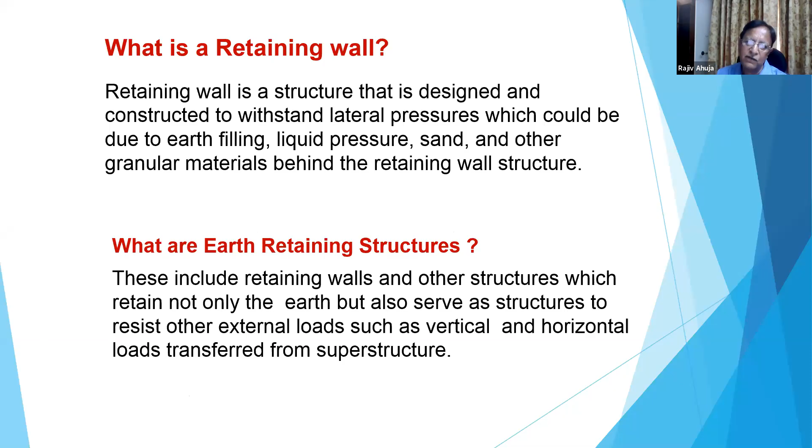Earth retaining structures have a very wide application in bridge and highway engineering. The quantity and cost of such structures can be very large, particularly in highway projects where such structures number in the hundreds and sometimes cost even more than major bridges. These are also used for slope stability purposes in hilly areas by the side of a road, and also used as retaining earth during construction phases, like sheet piling.

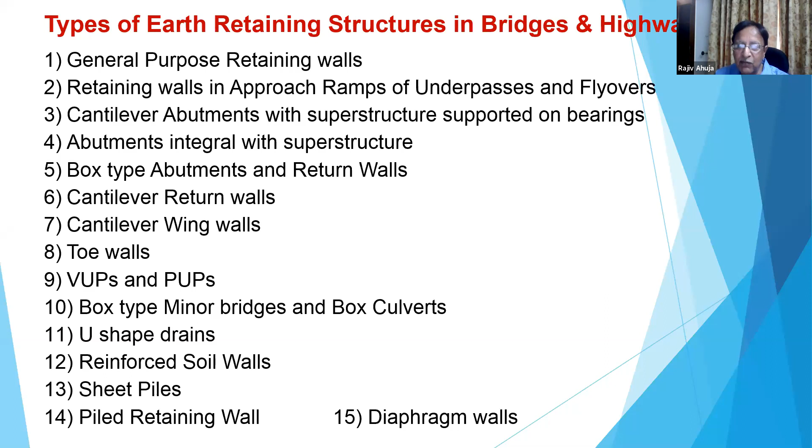If you look at the types of earth retaining structures, I have listed 15 types. First is general purpose retaining walls, then retaining walls in approach ramps of underpasses and flyovers, and cantilever abutments with superstructure supported on bearings. Then abutments can be integral with the superstructure. We have box type abutments, box type return walls, cantilever return walls, cantilever wing walls, toe walls, VUPs and PUPs—basically underpasses, which also act as earth retaining structures. Then we have box type minor bridges, box culverts, U-shaped drains, reinforced soil walls, sheet piles, pile retaining walls, and diaphragm walls.

Broadly, conventionally, retaining walls have been classified as gravity walls and cantilever and counterfort type walls. Gravity walls, as the name suggests, are constructed in PCC, stone masonry, brick masonry, gabions, and the stability comes from the weight. These are not reinforced, but the stability comes from the weight.

Whereas cantilever, counterfort, and buttress walls are constructed generally in RCC. We have a base slab, and the slab on the backfill side is called the heel, and the front side is the toe. If the height is not large, say up to 8 or 10 meters, we may have a simple cantilever wall. Otherwise, it can be stiffened by counterforts. Counterforts can be provided on the rear side—then we call it a counterfort wall. These can also be provided on the opposite side of the earthfill, and then we call it a buttress wall.

You see some samples here, like gabion gravity walls, which are provided by the side of the road. These are massive earth retaining structures and also help in arresting landslides. Cantilever RCC walls—all of you are very familiar with. And masonry buttress walls are more common, I think, in building structures.

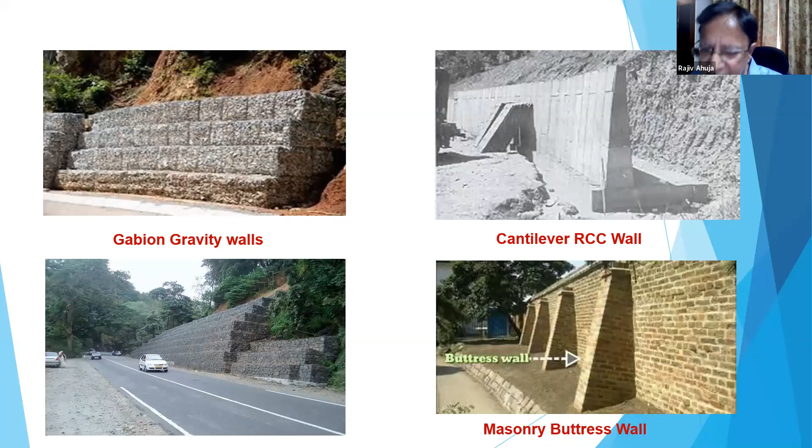In counterfort walls, we generally have rear counterforts starting from top to bottom. The advantage of the counterfort is that the front wall is stiffened, and it is then designed spanning across these counterforts. Counterforts are sometimes given on the front side also. If the heel span is quite large, then these are given on both sides.

Retaining walls can be precast also. Obviously, weight and height will be limitations. Base slab can be cast in situ, and the retaining wall comprising stem and wall can be precast. On left hand side, you see counterfort and wall precast together, whereas on right hand side, this is a hollow panel, because the height is more, to manage the weight it can be made hollow, and the cage is lowered inside subsequently and then concreted.

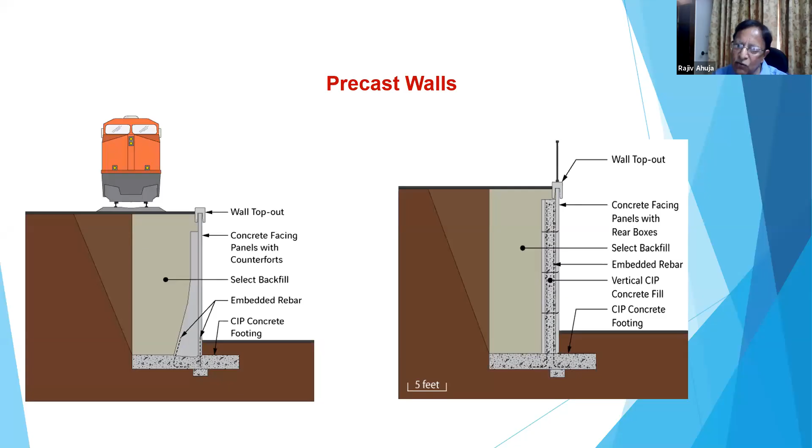Here you can see pictures of some precast retaining walls. This is done in India also, especially in box culvert structures, which have very large numbers in highway jobs. The height of retaining wall is limited to 4 or 5 meters, and since the number is large, these can be standardized and precast. This has been done in our country also.

Another type is anchored retaining wall. As the name suggests, the wall fascia is anchored into the hill. Anchors are driven into the material with boring, then are expanded at the end, either by mechanical means or often by injecting pressurized concrete, which expands to form a bulb in the soil. These are constructed when the space is limited or cutting of the existing slope is to be avoided. Anchored retaining wall is suitable for loose soil over rocks. You may have an existing formation of rocks, you want to construct a retaining wall and you are not able to provide a conventional retaining wall. Then anchored retaining walls can be provided.

These can be considerably high retaining walls constructed using this type. Deep cable rods or tie backs are driven into the earth and then the ends are filled with concrete. Anchors act against overturning and sliding pressure.

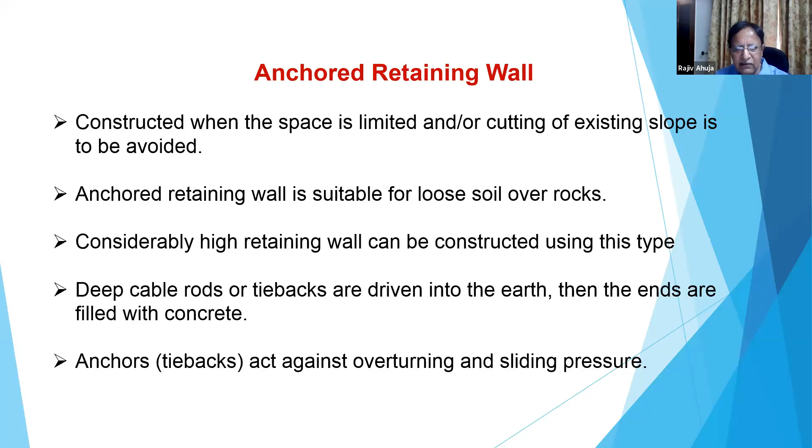Another type is L-shaped cantilever wall, though not very common. On the left-hand side, this is used to widen the existing formation. There is an existing formation, you widen at the top, but you cannot excavate behind, so you can provide an L-shaped retaining wall. On the right-hand side, the slab is below the earth fill. Here also, you cannot excavate for some reason on the front side, so L shape can be adopted. The only limitation is it cannot be very high, because to design a proper cantilever wall, you need a heel slab, you also need a toe slab.

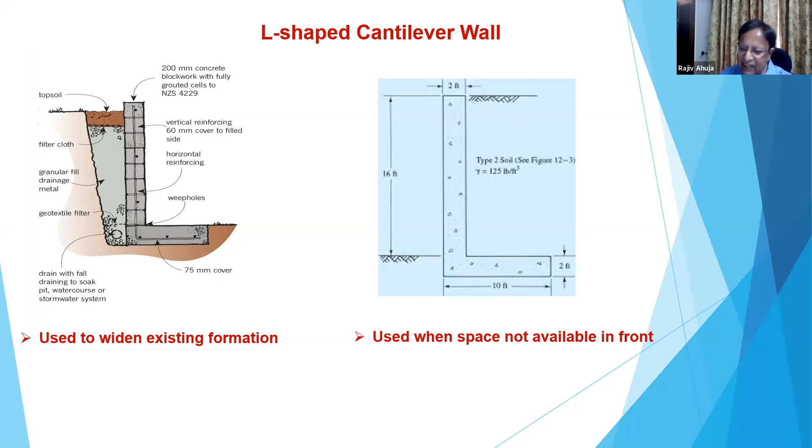Retaining walls also have openings for passage of water, either through a culvert or a minor bridge. So these things happen frequently in many projects.

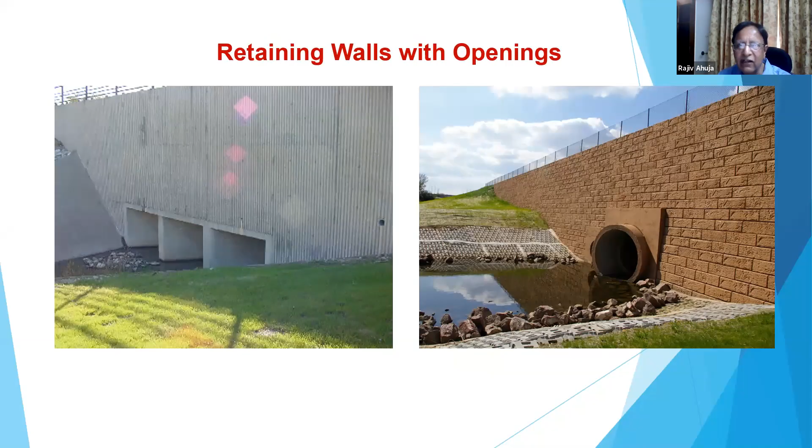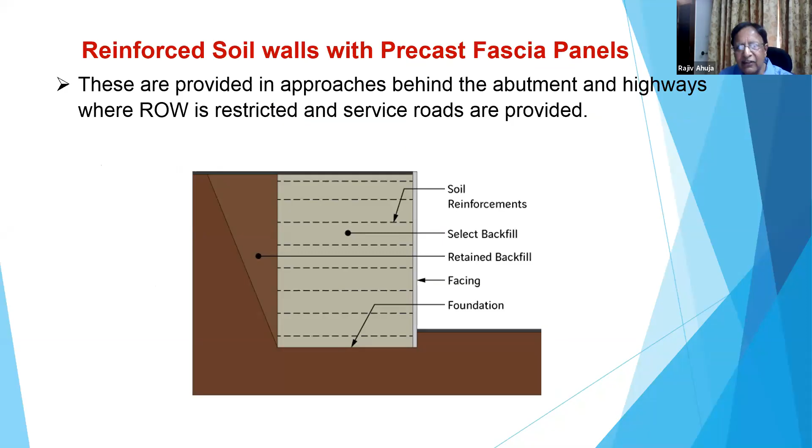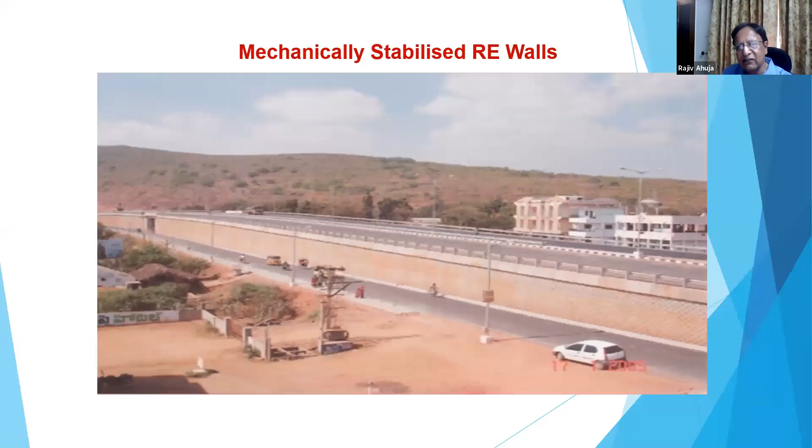This is a finished RE wall. It has a very long length. In fact, when the highway passes through towns, you don't have enough space, and viaducts are very costly, so the RE wall has become very popular. You can have a service road on both sides, and these have been constructed for a very large length, 3 kilometer, 4 kilometer also.

Then in hilly areas, yes, this is very popular. This is known as a breast wall when it comes to hilly areas. If there is a road, then we have to construct on both sides to stabilize the slopes, so that there is no landsliding.

In embankments, right of way is a problem these days. You want to have now, mostly road projects are 6-lane, and eventually these will be widened to 8-lane. The space is a problem. And because of a large number of VUP, PUP flyovers, the height of the embankment is also very large. It may vary from say 8 meter to even 12 meter, 15 meter. And the space required to accommodate the slopes may be very large. It may not even be available also.

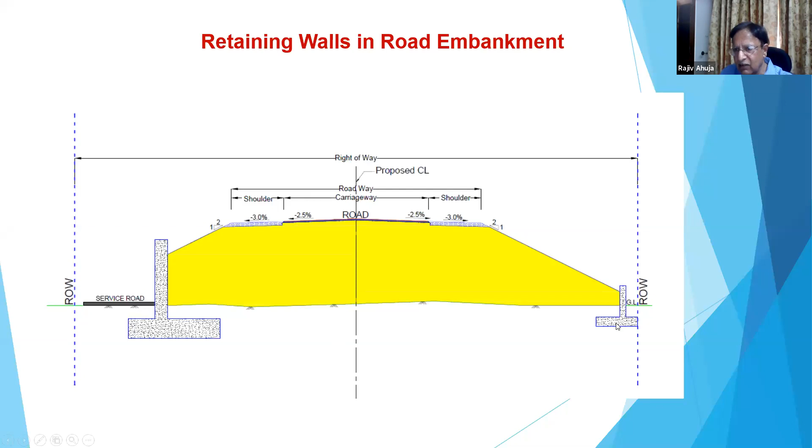And then you may have a service road on both sides, so the retaining wall becomes an integral part of an embankment. As you can see, there is a service road here. This is a retaining wall either as an RE wall or RCC structure. And on this side, there is no service road, so a small retaining wall, popularly called a toe wall, has been provided.

This is another interesting application. This structure is a real structure, used as an approach to a major bridge, and the subsoil is clay, soft clay, and there was no other option but to provide piles. So you can see each side retaining wall is supported on a row of piles, and then there's a longitudinal beam, and at every pile location, this is connected through a tie beam. Because of the tie beam, the thrust is transferred to the tie beam as a tension, and the piles have to be designed only for moment.

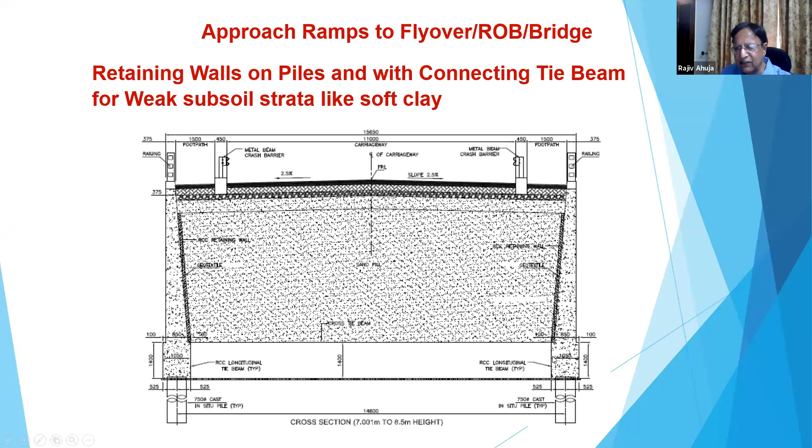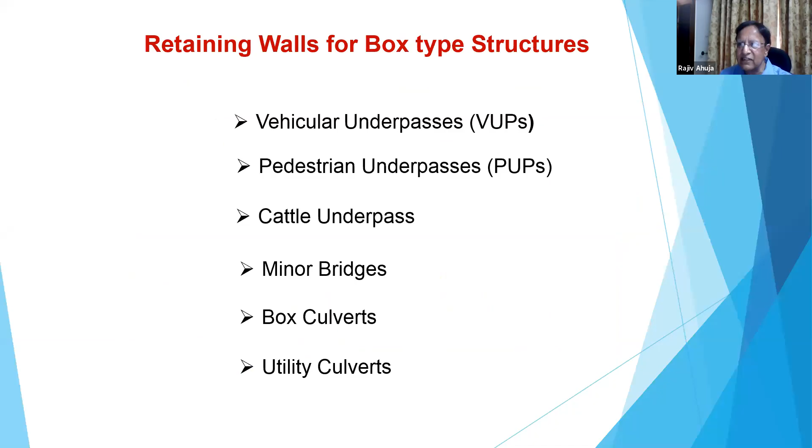Then box structures in highways also serve as a retaining wall, and these include vehicular underpass, pedestrian underpass, cattle underpass, minor bridges, box culvert, and utility culverts. Typically, VUPs are constructed over crossroads, and the standard dimensions are 12 meter wide and 5.5 meter vertical. These are clear dimensions, and these can be single cell, twin cell, depending on the width of the crossroad.

Pedestrian underpass normally has a dimension of 7 meter wide and 3 meter vertical clearance. Cattle underpass also has a width of 7 meter, but the clearance may be 3 to 4.5 meter, depending on the type of animals which might use this underpass. Like if one is expecting elephants to cross, then clear height will be even more than this.

The wing wall totally contains the embankment and nothing spills beyond this. Whereas in a return wall, you will always find the embankment spilling, taking the shape of a quadrant. We call it a quadrant.

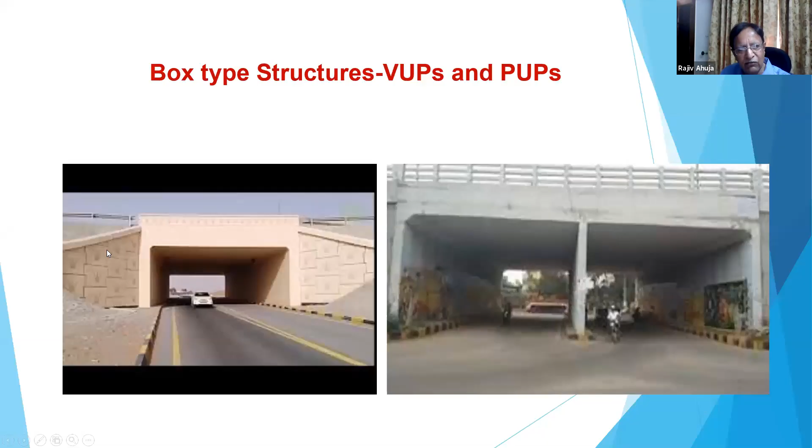These are some pictures of completed VUPs and PUPs. As you can see, these vertical walls also retain the earth, and you have the splayed wing walls over here.

Box type minor bridges typically have a span of more than 6 meters and length less than 60 meters as per IRC definition. Such bridges may be single cell or multi-cell box structure. Box culverts mostly are buried and have earth cushion on top, but in some cases the top slab is at the formation level of the road. This can be single cell or multiple cell.

Utility culverts or ducts are also provided as box sections sometimes. The width of these culverts may vary from 1.5 meter to less than 6 meter, and height is also variable, 1.5 to 4 meters. These are pictures of some completed box culverts, and you can see wing walls over here, which can be very long also.

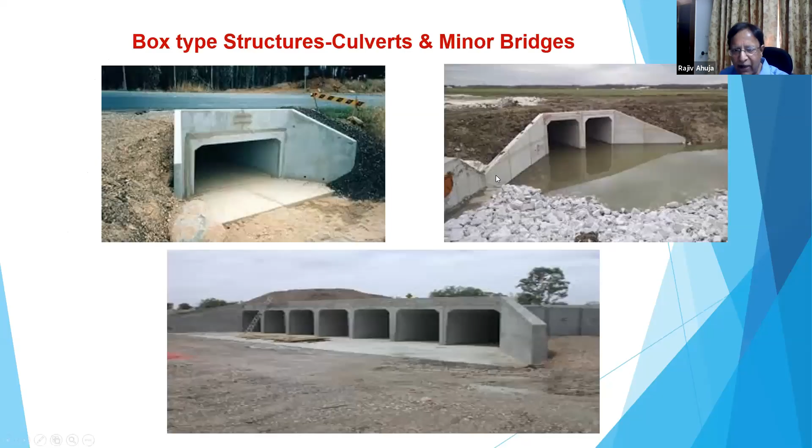Even U-shaped drains are also designed as earth retaining structures, especially in highway jobs when there's a built-up area. Between the service road and built-up area, these U-shaped drains are constructed with a typical height of say 1 meter. At some locations where the discharge is very high, even large-sized U-shaped drains are constructed.

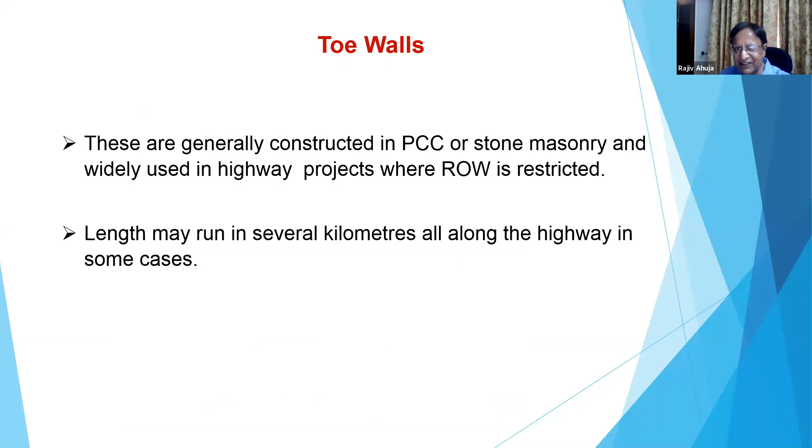Toe walls are very small height walls, generally constructed in PCC or stone masonry, and widely used in highway projects where ROW is restricted. Length may run in several kilometers, sometimes all along the highway. I have seen contractors bidding for a job not considering toe walls, or maybe nobody gave them the quantities, and while designing the structure they found the length was in kilometers.

Toe walls are also used at the edge of the quadrant pitching, which we discussed just now. This is an abutment, this is a return wall, and earth is spilling in the shape of a quadrant. Since the height is substantial, this is protected through stone pitching, and at the edge we provide a toe wall to prevent slippage and spreading of the soil.

Sheet pile walls are also very common. These are suitable for supporting deep excavation during construction, providing protection to existing structures during construction. If you are doing excavation in a built-up area, you have to protect the buildings. Building cofferdams is a very important application in rivers for construction of well or pile foundations.

Sheet piles can be cantilevered for small heights, say up to 5 to 6 meters. If the height of excavation is large, this can be anchored at the back. Sheet pile material can be timber, RCC, or steel. Behavior analysis and design of sheet piles is quite complex.

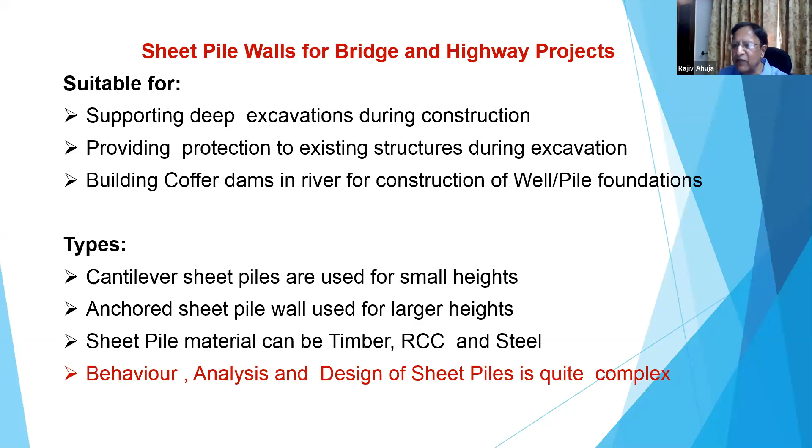Here you see an example of a sheet pile being used as a cofferdam. The sheet pile has been driven and a cofferdam has been created, because when you want to sink the well in a river which has a standing height of maybe 4, 5, 6 meters, you have to create an island. It's a normal practice, and sheet piles are used here, and well sinking can then be taken up.

On the left hand side, you see sheet piles. This is supporting the existing bridge. If you are constructing a new bridge by the side of an old bridge, very close to it, excavation has to be done for casting the foundation and abutments, and the existing formation is protected through sheet piles.

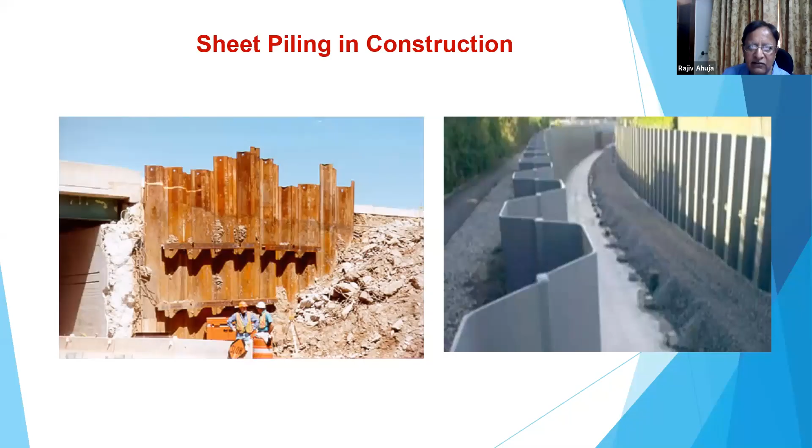This is an example of a large bridge where sheet piles have been used for casting the foundations.

Another type is secant and contiguous pile walls. Secant pile walls are formed by constructing intersecting reinforced concrete piles. You can see here these are called primary piles, which are cast in stage 1. Once these are cast, secondary piles are cast with reinforcement or a structural steel section, and then this becomes a full wall.

These are provided where sheet piles cannot resist the high earth pressure, and if these are to be used as a permanent structure, one can provide waterproofing as well as a concrete wall. Now, contiguous piles are a little different. These piles have a little gap in between, consisting of piles arranged in a line, typically with a 150 millimeter gap between the piles. The soil between the piles can be stabilized using grouting technique if necessary, either before or after pile installation.

Here you can see the completed pile wall, and the left hand side shows schematically how these are constructed. Primary piles are constructed first, as you can see here, and then secondary piles with the reinforcement are constructed subsequently.

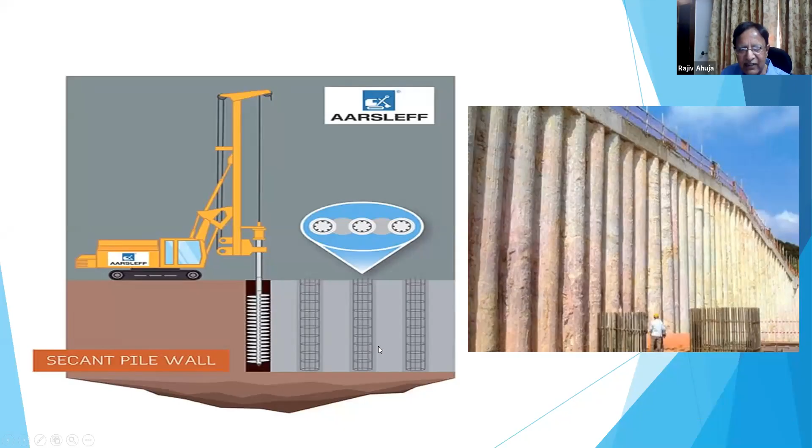A diaphragm wall is basically a continuous wall constructed in the ground to facilitate certain construction activities, such as to support deep excavation or as a permanent retaining wall. It is constructed using a trench excavated in the ground and supported by bentonite or similar fluid, until the mud is replaced by concrete after steel cage installation. Construction of a diaphragm wall is more or less similar to bored cast-in-situ piles, and it can be constructed up to a depth of even 60 or 70 meters.

This picture shows schematically how it is constructed. The first step is to construct a guide wall, for the entire length, with a clear dimension matching the thickness of the diaphragm wall, which may be 600mm to 1.2 meters. Then panel by panel construction is done.

First one panel is taken, which may have a width of 2 to 4 meters, and excavation is done through a clamshell or a grab, with end stoppers also provided. Once it has been excavated, the cage is lowered and it is completed, and space is left between this one and the next one to be taken up. Once alternate panels are constructed, the intermediate panels are constructed subsequently.

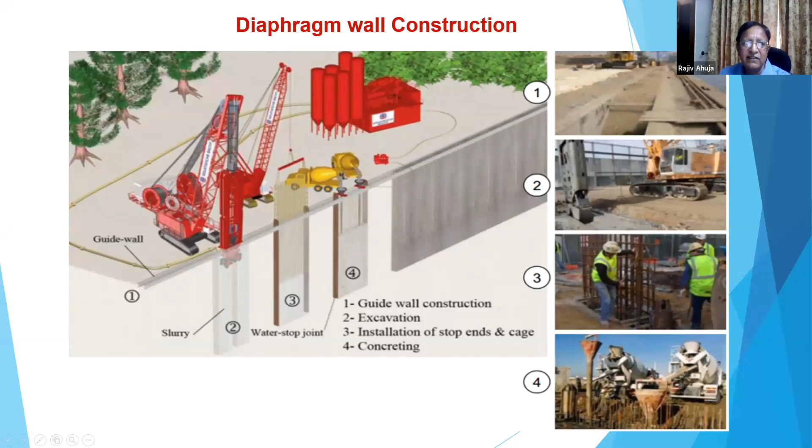In bridges, apart from temporary construction, these are also used as permanent structures. In an underpass where space is very limited, especially in urban areas, diaphragm walls can be used as a retaining structure for the underpass. They are also used in integral bridges where the abutment is a wall type and space is a problem, so the diaphragm wall can be used as an abutment too. Apart from this, diaphragm walls are very common in underground structures like stations, parking, etc.

This picture is for an underpass in Ludhiana. And when you look at it, you can't make out that a diaphragm wall has been constructed here.

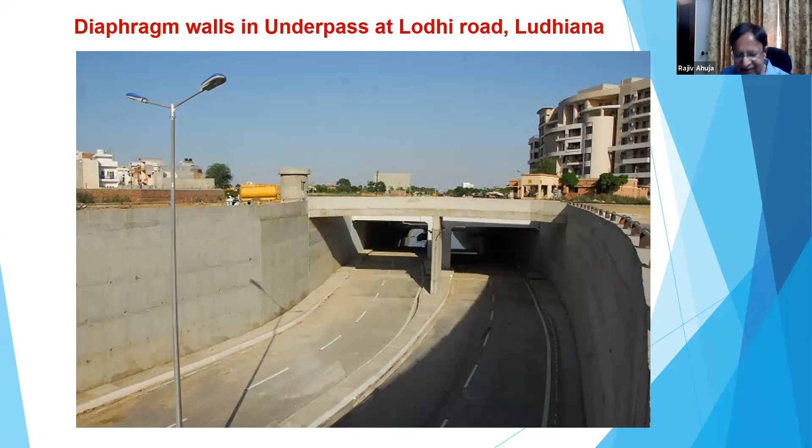The most common retaining wall structure in bridges is obviously abutments. Abutments are structures which support the superstructure either on bearings or integral with the superstructure, normally constructed along with the return wall or wing wall which we discussed earlier. Abutments can be non-spill-through or spill-through, and may rest on open foundation, pile foundation, or well foundation. We have box type abutments supporting the structure on bearings, and even box type structures can be integral with very large cantilever superstructures.

You can see in this picture, this is the abutment, and these are the wing walls, these are the return walls.

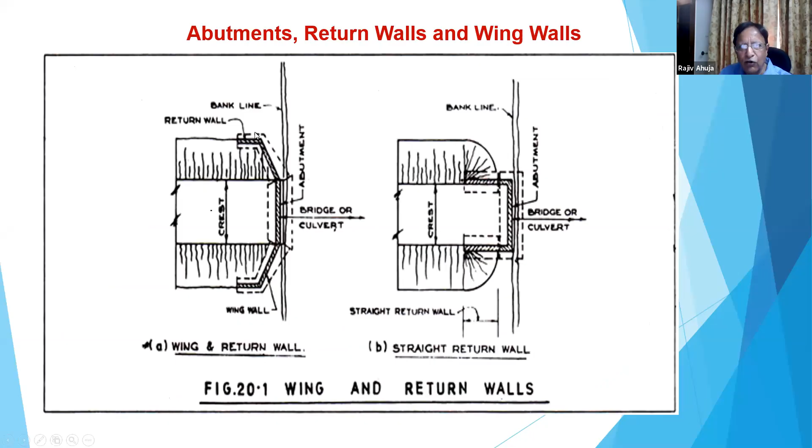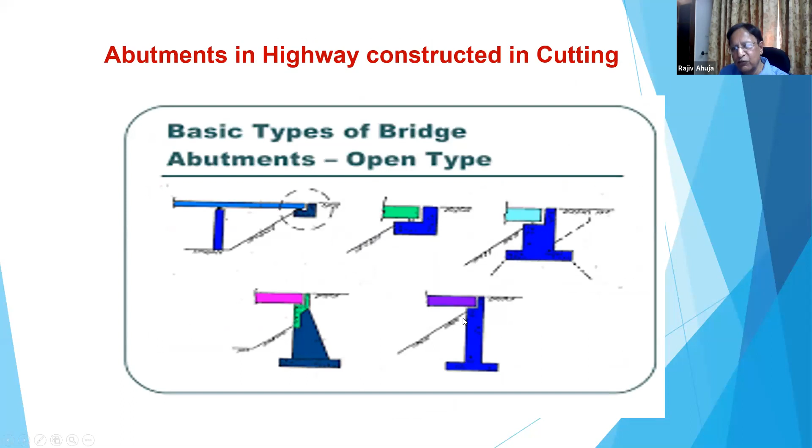Highways are constructed in cuttings, and overpasses may have to be constructed there. The retaining structure can be as small as just a bed block, if the rock is very good. Depending on the quality of the rock, the depth can be decided, and if the quality is very poor, the depth can be substantial.

Then we have bank seat abutments. These are suitable for small spans only. Why do we call it a bank seat abutment? This bank seat is resting on an earth fill, which can be a normal earth fill. In this case it is an RE wall, but this is suitable only for small spans because the bearing capacity here will be limited, and even the RE wall or retaining wall has to be designed for this surcharge. So spans are limited, but it looks very nice.

In this case, the retaining structure or abutment is RCC and the superstructure rests behind it. Here you can see some examples of bank seat abutments, and this is an RE wall, both longitudinally as well as in the transverse direction.

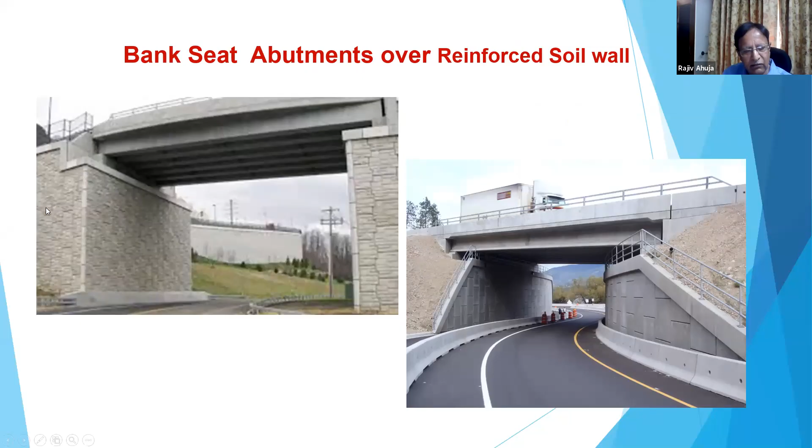In this case, the superstructure span is very large and the loads are very heavy. It's not possible to rest it on earth fill, so an independent structure is created. These are just like piers, normal piers, and just behind that, a retaining structure is created. We have two longitudinal walls and one transverse wall. You might have noticed this kind of construction is very common in our country now, especially in flyovers and ROBs.

We have another type, integral abutments. In an integral abutment, as the name suggests, the superstructure is integrated with the vertical wall, and it becomes an indeterminate structure. It may have an open foundation, it may be supported on pile foundation, or it may be just outside the RE wall. Sometimes it is supported on a single row pile or an embedded wall abutment, which is normally constructed as a diaphragm wall.

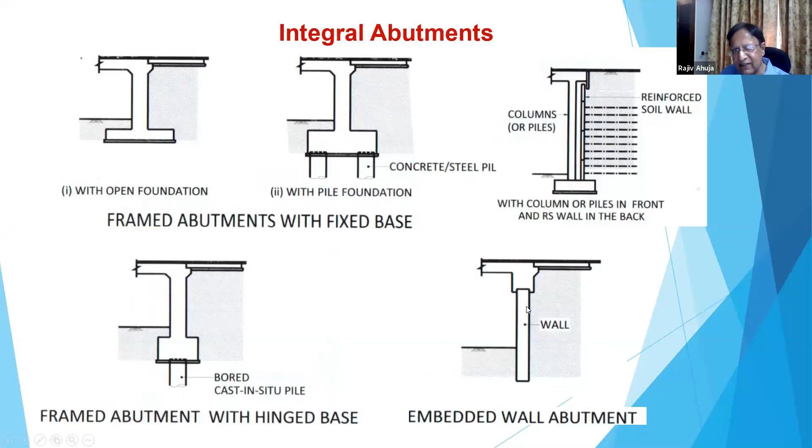We call it spill through abutment. Why spill through? Because sometimes earth pressures can be very large. If you construct a solid structure, it may be difficult to design the abutment, especially when it rests on pile foundation or open foundation. When you make it spill through, you relieve the earth pressure partly.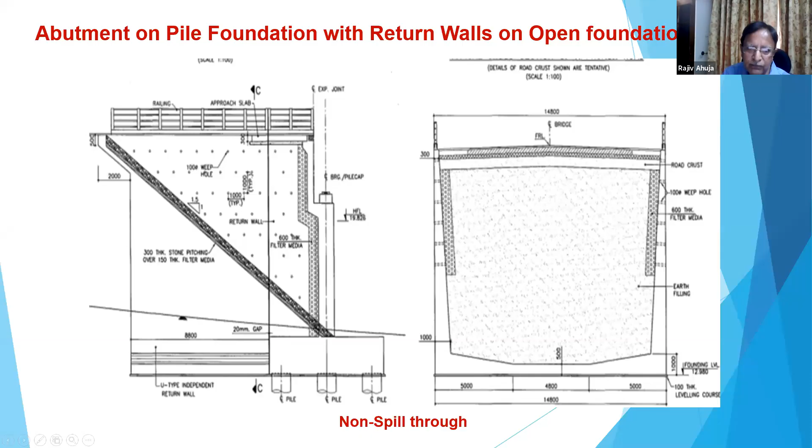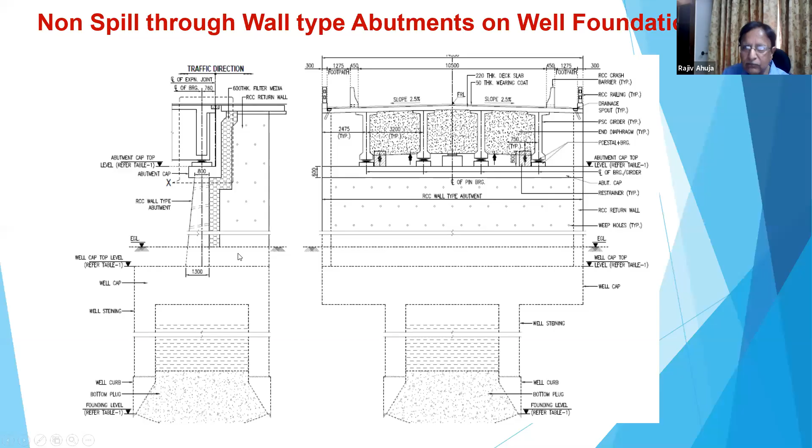In this case, if you notice carefully, the abutment is shifted. This is not constructed at the center; it is rather constructed at the edge, and the well cap also has been projected. Why do we do this? Because well foundations, especially abutment well foundations, are designed as a retaining structure, where the difference between formation level and founding level may be 25 to even 40 meters. This is a very large height, though it is resisted passively from the opposite side. But to reduce the active earth pressure, the abutment is constructed eccentrically with respect to the center line, and because of this eccentric weight, it provides a moment opposite to the active earth pressure moments.

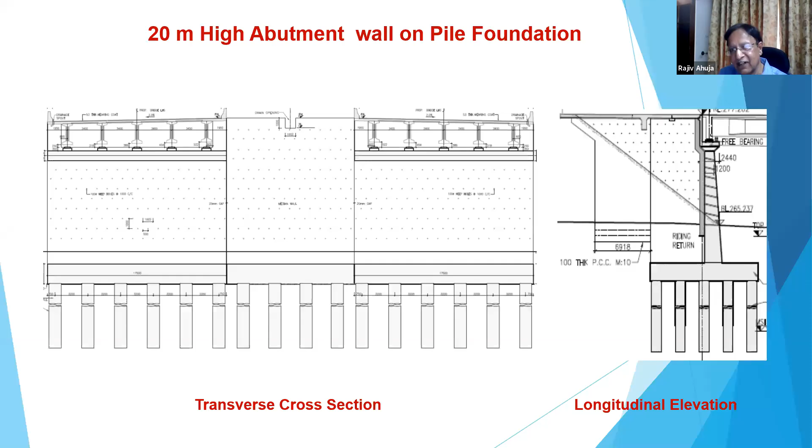This shows a 20-meter high abutment wall, with one bridge on the left-hand side and another carriageway on the right-hand side. In between, we have a median wall. This height is almost 20 meters and it rests on pile foundation. It's also non-spill through because we tried to provide spill through, but the client refused; they only wanted non-spill through. The thrust on each pile is very large: for a normal situation it is 100 ton, and for seismic it is almost 150 ton per pile.

You can see another section of 20-meter high wall on pile foundations. These are being constructed right now. And even while these are constructed, the abutment cap is complete and girders are being erected.

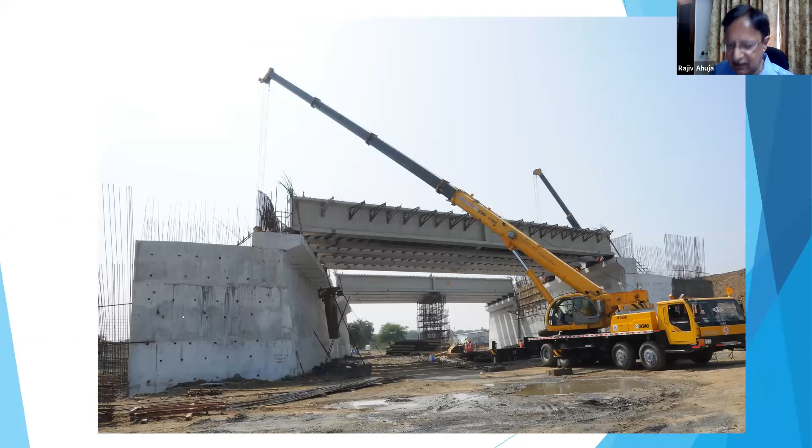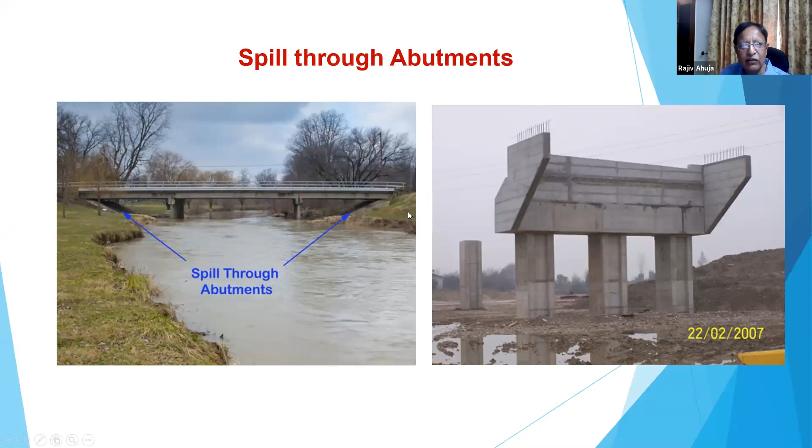Here you see pictures of a spill-through abutment. It has 3 piers and these are the openings through which earth spills. This is an abutment cap. These are butterfly wing walls and these are dirt walls. Left-hand side, you see the finished structure.

Now these abutments, when provided over river bridges, rivers are scourable. So to protect the abutment against scour, we have to provide a launching apron. In that particular case, the scour level is taken at the base of the pile cap or well cap because this is totally protected.

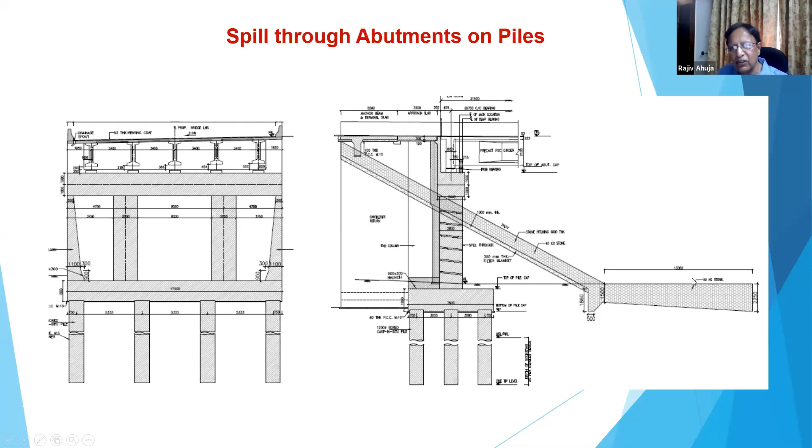Another interesting application is box type, counterweight type abutments, generally provided in hilly areas. In hilly areas, you will find you don't have space behind; after crossing this bridge, you have to take a turn left-hand side or right-hand side immediately. So the popular technique is you construct a huge abutment, constructed as a cantilever from both sides.

In between, you can have a suspended span or a central hinge. Now you can imagine this span can be as large as 130, 140 meters. This has been constructed in our country.

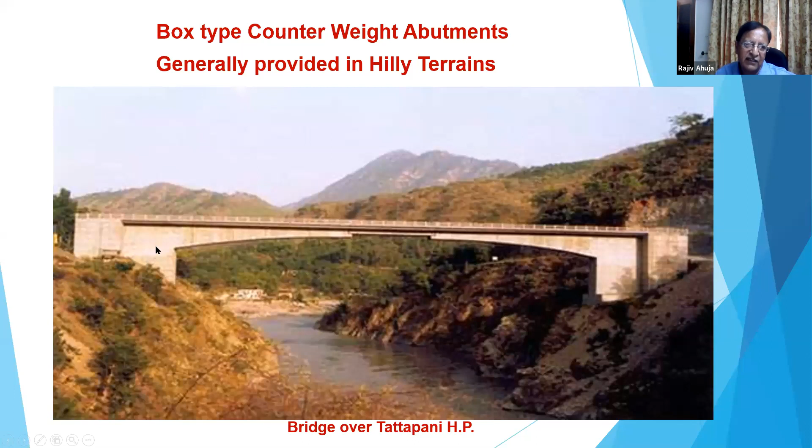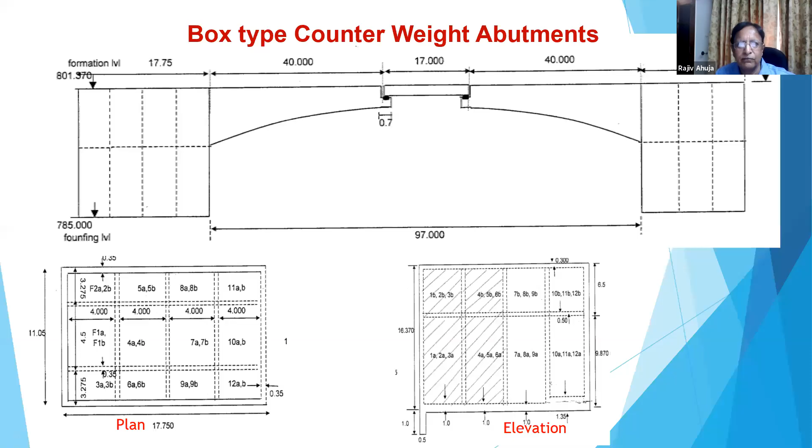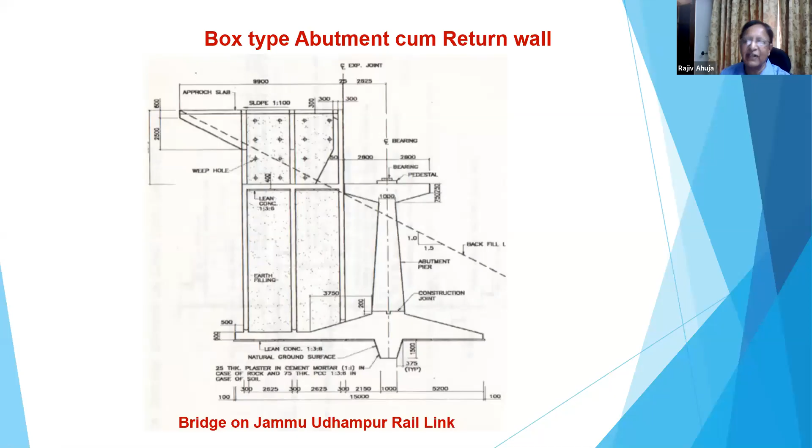And to retain the earth from behind, a box type retaining structure has been created. This was a very innovative idea in year 2000 when several bridges were constructed on the Jammu-Udhampur rail link, and I think this system was adopted in at least 3 bridges.

We have seen a large variety of earth retaining structures, and there may be many more, but all these have a common factor: they have to be designed for lateral earth pressure. There are many theories. Typically, lateral earth pressure includes active earth pressure due to retained earth and surcharge, earth pressure at rest due to retained earth and surcharge, passive earth pressure due to earth and surcharge, active earth pressure under seismic condition, passive earth pressure under seismic condition, then hydrostatic pressure in combination with earth pressure. There are some other causes of lateral earth pressure too.

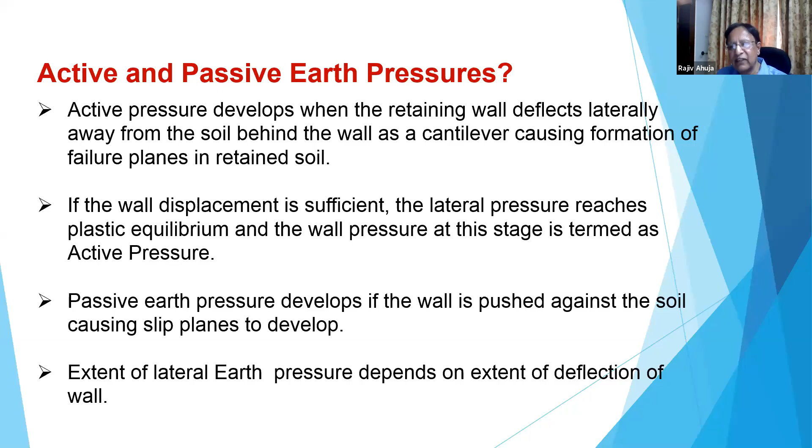Active earth pressure develops, as we all know, when the retaining wall deflects laterally away from the soil behind it as a cantilever, causing formation of failure planes in the retained soil. If the wall displacement is sufficient, the lateral pressure reaches plastic equilibrium, and the wall pressure at this stage is termed active pressure. Passive earth pressure develops if the wall is pushed against the soil, causing slip planes to develop. The extent of lateral earth pressure depends on the extent of deflection of the wall.

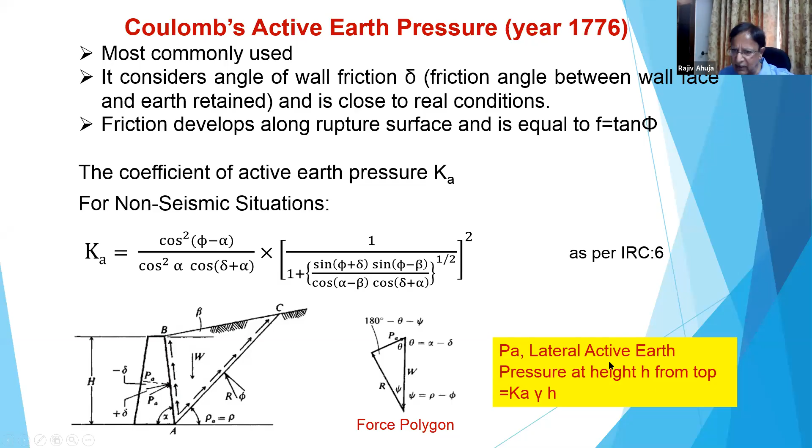Another thing is, if the back face is sloping, then Coulomb's theory includes this also in its equation. As you can see, phi is the angle of internal friction, alpha is the angle of the wall along with the vertical, and delta is the angle of wall friction, typically 2/3 of phi. And the lateral active earth pressure is then given by Ka gamma H.

Now, earth pressure at rest develops when the wall does not deflect, being sufficiently rigid or not able to deflect, like in a closed box structure with earth pressure acting from both sides. So in a box type structure, earth pressure is acting from both sides, and if the filling is done parallelly from both sides with no rotation, then this is earth pressure at rest.

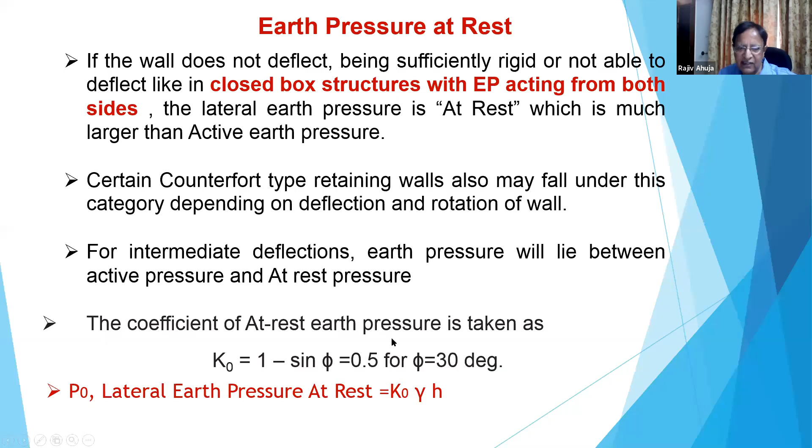Certain counterfort type retaining walls, where the stiffness is quite high, may also fall under this category, depending on deflection and rotation of the wall. If the wall is stiffened and resting on rocky terrain, deflections will be very small, and one cannot take active earth pressure here. For intermediate deflection, earth pressure lies between active and at-rest pressure. Typically, coefficient of at-rest pressure is 0.5 for phi equal to 30 degrees.

In addition to earth pressure due to retained fill, we also have surcharge, either permanent surcharge or live load surcharge. In bridge structures, as per IRC, live load surcharge equal to 1.2 meter height of earth is specified for design of abutments. Whereas in case of retaining walls, that is return wall or wing wall, if these are within 3 meters of traveled road, that is within 3 meters of paved shoulder, these have to be designed for live load surcharge, otherwise not.

And earth pressure due to surcharge is given by K times Q. K can be active, passive, or at rest, and Q can be permanent or due to live load. If it is due to live load, then as per IRC, this value is 1.2 meter height of earth into density of earth, that is 24 kilonewton per square meter.

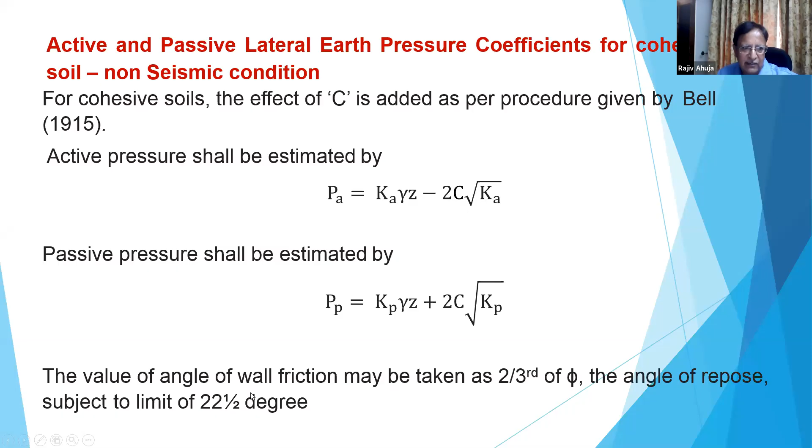Now, Coulomb and Rankine did not include cohesion for cohesive soil, C was not included. And Bell in 1915 gave this equation. So this Ka gamma Z can be either Coulomb or Rankine, and this has to be reduced by 2C under root Ka. Similarly, for passive pressure, this has to be added.

Now, if we compare these two theories, in general, Coulomb's theory applies where the wall interferes with the backfill, that is wall friction is considered, that is delta. Rankine theory is applied when there is no interference of the wall with backfill, wall friction is not considered, meaning the back face is assumed as a smooth face with delta equal to 0. Obviously, Rankine theory is more conservative and is used for its simplicity, particularly for design of low height walls. However, Coulomb theory is more widely used for bridges in our country and is also recommended in IRC 6.

This table shows a comparison of coefficients obtained by Coulomb as well as Rankine theory. Now, alpha is the angle with the back face measured with the vertical. I have taken two examples, 0 and 5. For 0 and for beta 0, that is top face horizontal, it is 0.297. And if the top face is sloping, say 25 degrees, which is close to 2:1 slope, it shoots up to 0.487. In Rankine, it is 0.33 and 0.4936.

Now, if the back wall is sloping, even with 5 degrees, the coefficient has increased to 0.332 and 0.553. Now, Rankine has no provision for alpha, so one has to use Coulomb theory in that case.

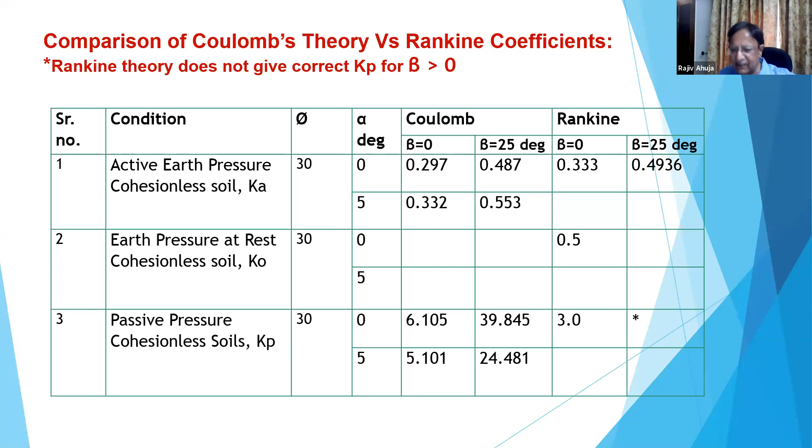There may be other reasons for lateral pressure, like ice formation. Lateral pressures can develop when the pore water in the backfill freezes. Then there's swelling pressure — if the retaining wall backfill is an expansive clay whose water content increases beyond that at the time of placement, it can expand and produce very large lateral wall pressure.

So it's very important for a designer to clearly give specification in the drawing that clays should not be filled up — only granular material with a particular design value of phi, free draining material meeting MOST specification. All that should be very clearly defined in the drawings, otherwise there may be trouble.

Then there can be thrust due to temperature. Like in integral bridges, the top deck expands and pushes the wall against the earth fill, and that may increase the earth pressure. And there can be, interestingly, lateral pressure due to over-compaction.

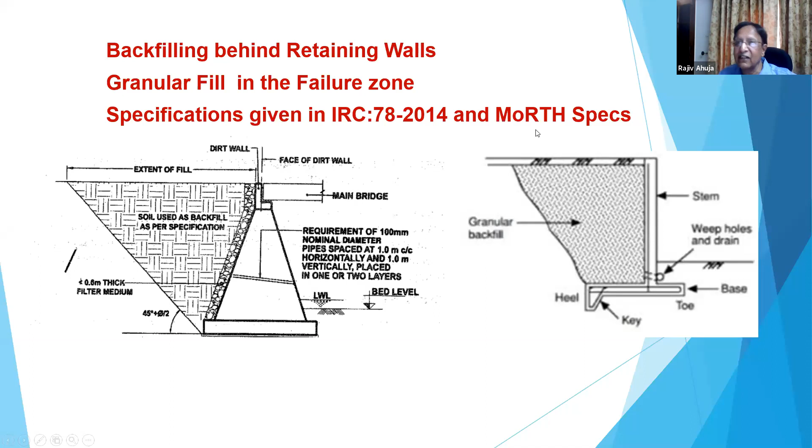Typically in a cantilever wall which has a heel slab, this angle has to be measured from the edge of the heel, not from here — it has to be taken from here. So this has to be clarified in the drawings, and all the specifications are given in IRC 78 and MORTH guidelines.

This diagram shows application of the earth pressure diagram. If you have to design a stem, then the earth pressure will be acting at the face of the stem. But for external stability, like base pressure, overturning, sliding, this has to be taken at the edge, and this height will be much more than that height if the top face is sloping.

This diagram shows earth pressure due to surcharge along with the triangular diagram. If you have a water table somewhere in between, then the earth pressure diagram will look like this.

This first diagram is due to surcharge, and this triangular diagram is basically gamma D into H1. Gamma D is the dry density, H1 is this height, and this is taken down to the bottom. For this height, which is submerged soil, we add gamma submerged into H2, and since there is no proper draining arrangement, hydrostatic pressure will also be added, gamma W into H2.

And if the other side is typically well compacted and there is no chance of removal of this soil, then one can consider passive relief also.

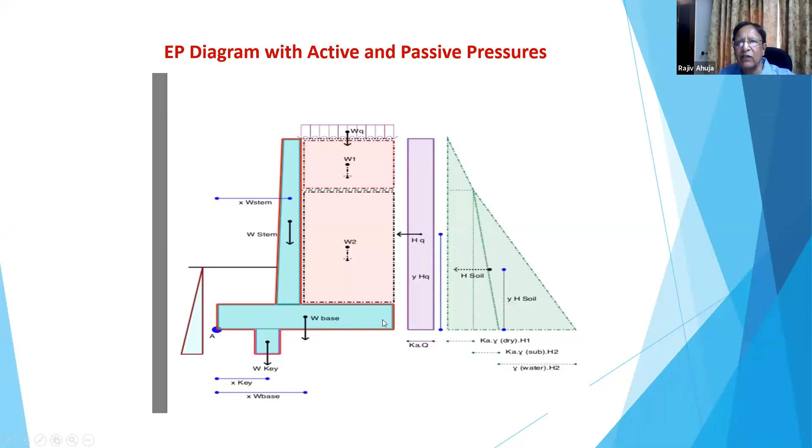Here we will take earth pressure at rest. In an integral structure, as discussed, the deck expands and pushes the soil, so it has to be first designed for earth pressure at rest. The important thing is that after construction, filling has to be done in parallel from both sides — if you do it from one side, the behavior will be different. Now, earth pressure at rest is shown here.

This coefficient is known as K star. Now this coefficient lies between K0, the earth pressure at rest coefficient, and passive pressure. It is not as high as passive, much less than passive, but much higher than earth pressure at rest.

If you see this diagram, there is a code IRC SP115 for this, and also a British code. Up to the mid height, it has to be taken like this: H by 2 into gamma into K star, and it has to be dropped down vertically till it meets the K0 diagram, and this is the final earth pressure diagram. In the embedded wall, it is more or less similar, except that H by 2 is replaced by 2H by 3.

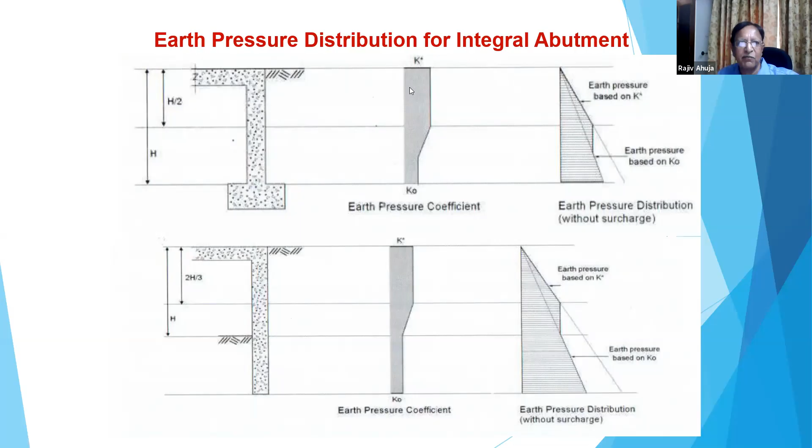Now for a typical open foundation, which provides fixity at the base, this K is given by D by 0.05H raised to power 0.4 into Kp, but this value will not be less than K0. Now if you take phi 30 degree, H...

Our code limits the movement of structure to plus minus 20 millimeter, which means normally you cannot construct more than 60 meter for this kind of displacement. And for full height embedded wall, then this increases.

I think there is a problem, but we'll come back soon. Just 1 minute. I think it may be loss of connection. Just 1 minute, we'll come back. So sorry, I got disconnected. Can you hear me please? Yes sir, we can hear you and see you. I have also made you the host, so you will be able to share. Okay, fine, yeah.

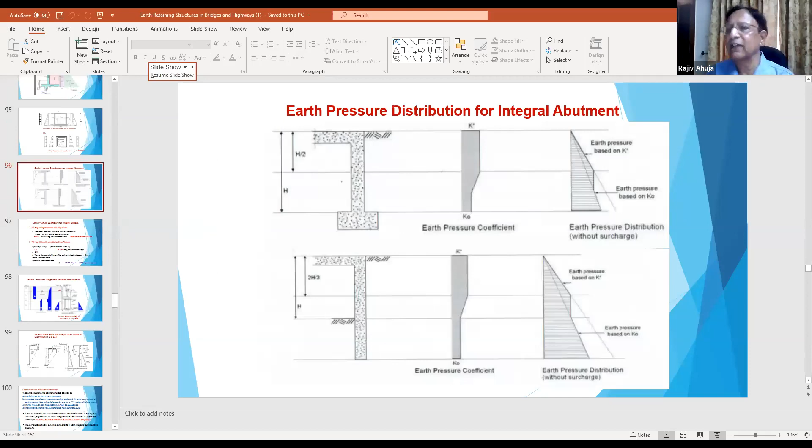Okay, we were somewhere here. Yes sir. Normally for calculating active earth pressure, we take phi. Can you hear me please? Yes sir, yes sir. Oh. Can you hear? Oh okay, you can hear me.

So normally we take phi equal to 30 or 35 degree, but when you are compacting the soil, layer by layer, to 95% of Proctor density, the actual phi may be much more, even 40 or 45 degree. Now when we calculate active earth pressure, we calculate for 30 or 35 degrees, so even if actual phi is 40, 45 degree, it doesn't matter because we are on the conservative side. But in this particular case, if our phi is higher than 30, the passive pressure coefficient can increase substantially, so we have to be very careful. It's not always correct to take phi equal to 30 or 35 degree. At site it may be more, and in this particular case, it will add to the pressure.

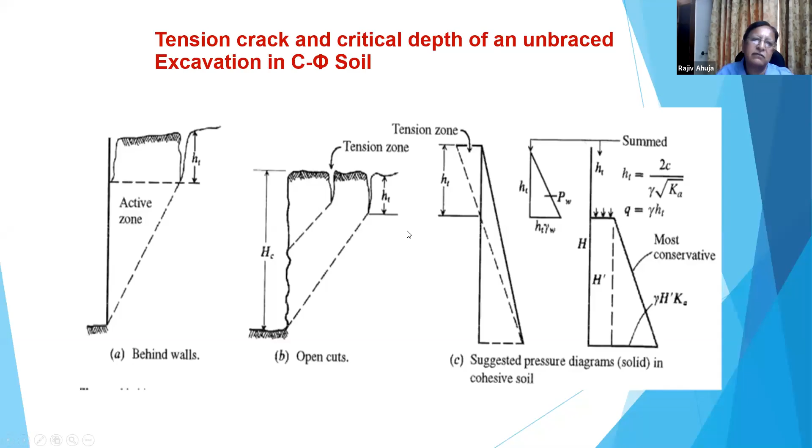Now, seismic situation also we will discuss. In a seismic situation, there will be inertia. Now I'm talking of abutment or retaining walls.

The inertia forces, there will be inertia forces on structural components depending on horizontal seismic coefficient. Then there will be increased lateral earth pressure, including static and dynamic component of earth pressure due to inertia forces AH/AV on W, weight of failure zone.

See, there is a failure wedge, which I showed you. Now, if the weight of failure wedge is multiplied by AH, that gives a horizontal inertia force, and AV, that is vertical coefficient, may act in either direction. It can be upward or downward, so it's taken as plus minus, and then the equations are modified.

The inertia forces on soil mass resting on heel side of base slab. In abutments, inertia forces transferred from superstructure. Active and passive pressure coefficient for seismic situation, CA and CP, are calculated. These are given in IS 1893 as well as IRC 6.

Now, what is CA? It's a coefficient of active earth pressure, which includes seismic component also, dynamic component also. And these equations were developed by Mononobe Okabe in 1926 based on Coulomb's equation. So this equation has been taken from IS 1893 and IRC 6.

As you can see, the active pressure force is half gamma H square, half WH square, which is a density, and C is a coefficient of dynamic active pressure, which also includes static component. Now the lambda is tan inverse AH by 1 plus minus AV.

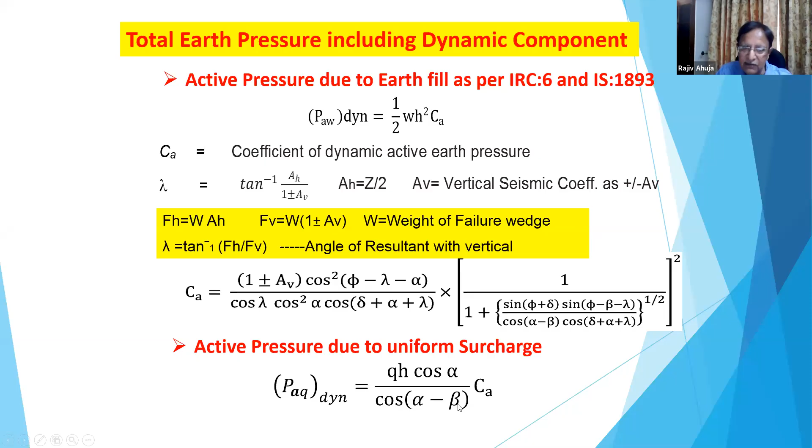And this is the expression for uniform surcharge if you have a sloping back face and sloping earth. If the soil is saturated, then lambda is modified by taking saturated density.

Now, this CA has two components, as I said, static component, which we know acts at H by 3. And for surcharge, it acts at H by 2. And dynamic component, you can subtract static component from the dynamic component, but it acts at H by 2 for triangular earth pressure and 2/3 H for surcharge.

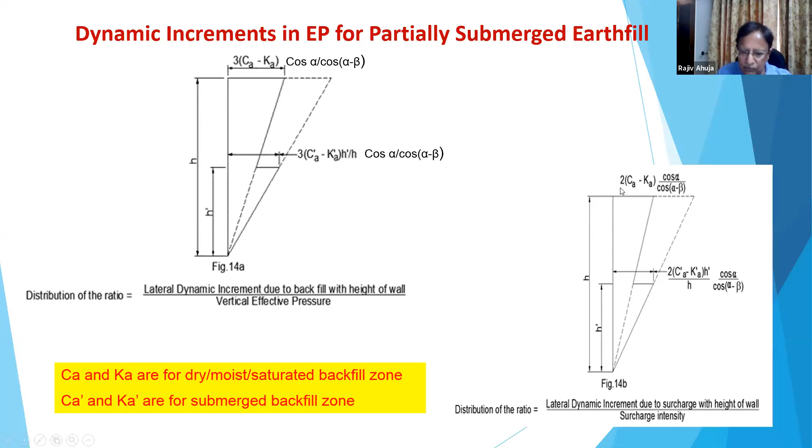Now using these equations, we can find for a typical case: phi 30 degree, delta 20, beta 0, that's a horizontal surface, AH Z by 2. Then EV is 30% of 2/3 of AH, 0.024, KA is 0.315, CA is 0.409.

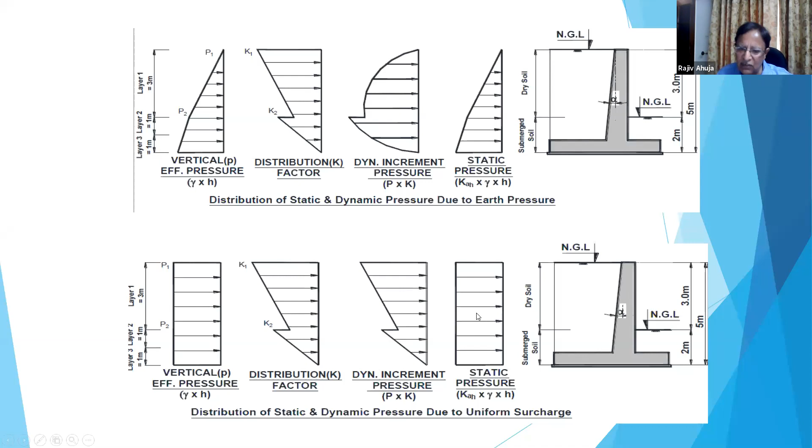And this is a diagram for surcharge. You have a static pressure and then vertical pressure. In this case, this is a surcharge, not gamma H basically. And this is a distribution factor applicable to surcharge. You multiply these two and you get the dynamic increment due to surcharge. Using these two diagrams, you can work out the final forces.

Now, you can refer to paper 626, Indian Roads Congress Journal, published in 2014 for detailed illustration, written by Mr. Alok Bhowmick, where many examples have been solved. Also, commentary on IRC 6 2017 will be shortly published by IAStructE, which gives worked examples to illustrate this procedure.

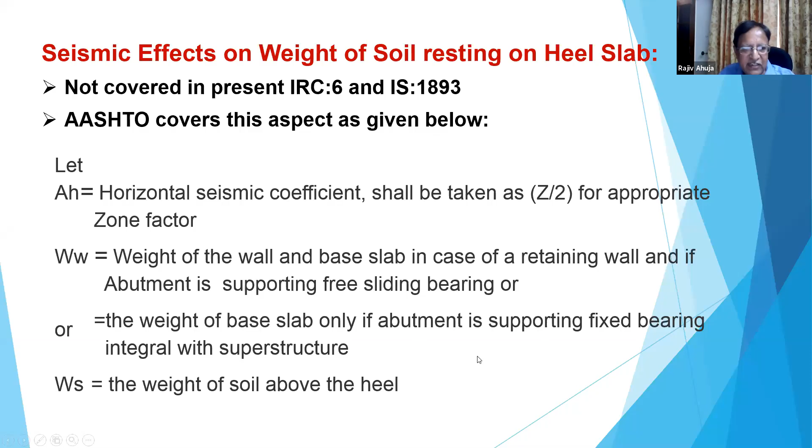Now, we have a backfill resting on heel slab, and our codes do not cover this aspect, so I will quickly explain. You are familiar with AH, and WW is the weight of the wall, base slab, and earth fill. Sorry, without earth fill - weight of wall, base slab in case of retaining wall, and if abutment is supporting free sliding bearing, or the weight of base slab only if the abutment is supporting fixed bearing integral with superstructure. WS is weight of the soil above the heel.

The total seismic force is given by P dynamic plus PIR. Now P dynamic is same as what we discussed just now, because of static and dynamic increment. It is the PIR which we have to understand. The PIR is AH, that is horizontal seismic coefficient, times WW, weight of abutment, plus weight of soil. So this is basically a horizontal inertia force due to seismic loading of the wall mass.

So two cases need to be investigated. In the first case, take 100% of seismic earth pressure, P dynamic, with 50% of inertial force, PIR. And combine 50% of P dynamic, but not less than static active earth pressure force, with 100% of PIR. And the higher of these two has to be taken. Another important thing is the inertia force associated with the soil mass on the heel slab behind the retaining wall is not added to the active seismic earth pressure when structurally designing the retaining or abutment wall. That means these combinations have to be considered only for external stability, not for the wall design. And the basis for excluding this inertial force is that movement of this soil mass is assumed to be in phase with the structural wall system, with the inertial load transferred through the heel slab.

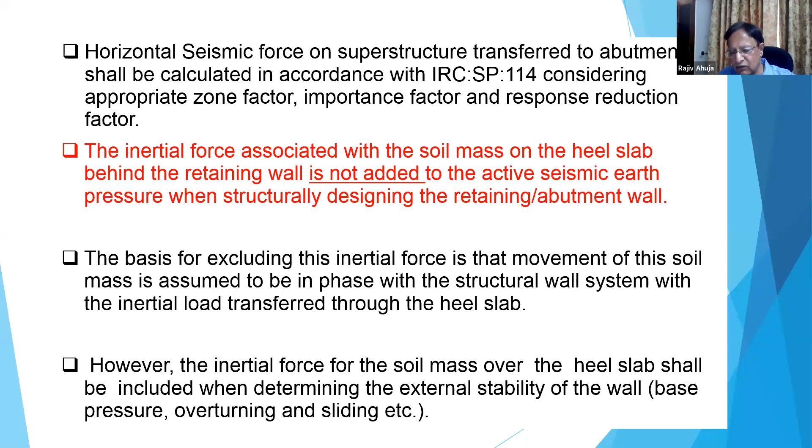Now this is AASHTO code, and Euro code gives slightly different recommendation. And there, if it is carrying fixed bearing, then it suggests soil-abutment interaction.

I think I will skip the design aspects. Most of you are familiar how to design a retaining wall. I will just show the diagram. So we normally check for sliding, overturning, soil bearing, and stability. This has to be checked if the underneath layer is a soft clay.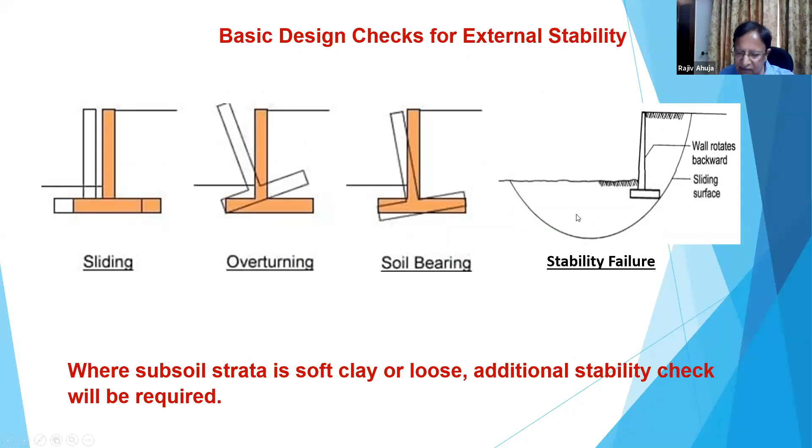Once we calculate total weight and the base width, vertical pressure will be W by B, and W into eccentricity by sectional modulus. This bearing pressure should be less than the permissible value.

Then we work out overall external moments, which is the overturning moment, that is sigma horizontal force into their height from the base. Resisting moment is total weight and its CG from the toe, which gives the restoring moment. The ratio of MO to MR is the factor of safety against overturning.

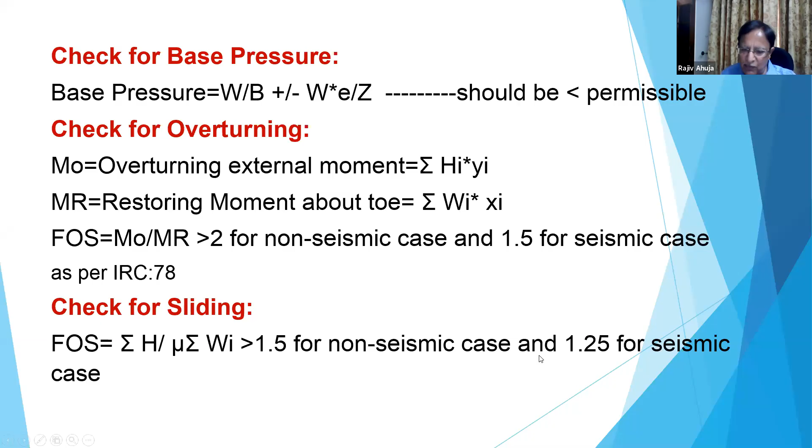As per IRC 78, it should be more than 2. Similarly, sliding factor is total external horizontal force divided by friction coefficient into total weight, and this should be more than 1.5 for non-seismic case and 1.25 for seismic case. Sometimes we have to provide shear keys also if the height is very large and the subsoil is poor, since coefficient of base friction is low. In that case, we provide a shear key so that we can get more passive relief.

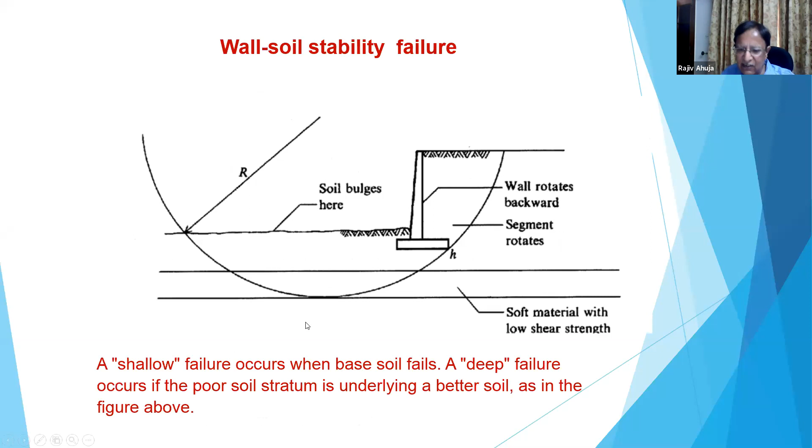If there's a very poor clay layer below the good strata, then failure may take place like this, and we have to be careful of that and check for it.

Now, structural design - most of you are familiar with this, but we have to be careful. When we design a vertical wall, the critical section for bending and shear will be at the base of the wall, not at D effective or something like that. Similarly for the heel slab, generally net downward pressure acts, and here too the critical section for bending moment and shear have to be taken at the face of the wall. In the toe slab, the critical section is at the face of the wall, but shear may be taken at D effective from the face of the stem.

Now, as you have seen, there is a very large variety of structures, and for each one the procedure is different, and I am not covering that here.

Abutments, I've already discussed. These are designed for earth pressure, and in addition are designed for loads transferred through the superstructure.

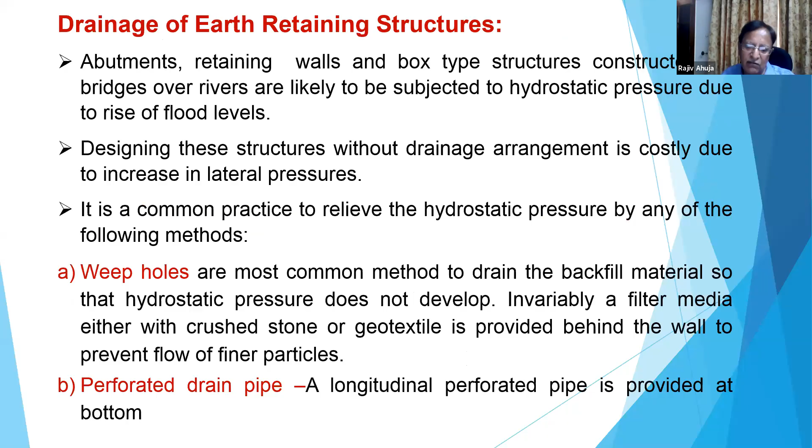Drainage of earth retaining structures is very important. We have already seen that if there is no drainage arrangement, the earth pressure will be very high, so we provide weep holes to dissipate the hydrostatic pressure, or sometimes a perforated drain pipe at the base. We provide a geotextile or filter media behind the wall, and this longitudinal drain pipe should have an outlet or an intermediate weep hole connected to it.

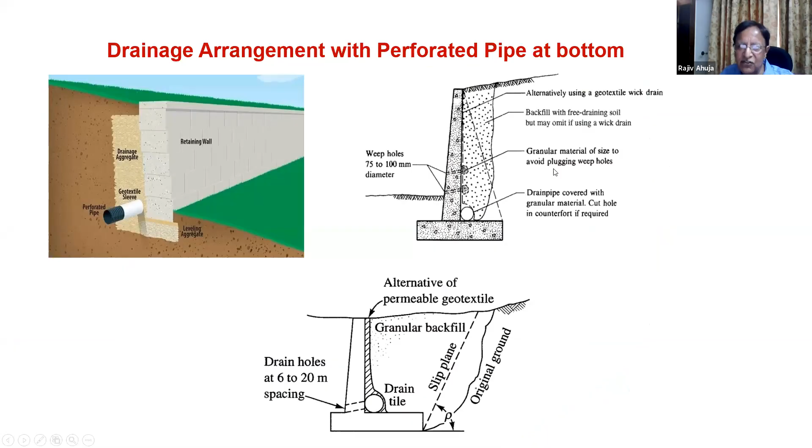The backfill has to be granular and should meet the specification. That is very important. If you don't provide drainage arrangement, as I explained already, the hydrostatic pressure has to be considered, but with a proper drainage arrangement this need not be considered.

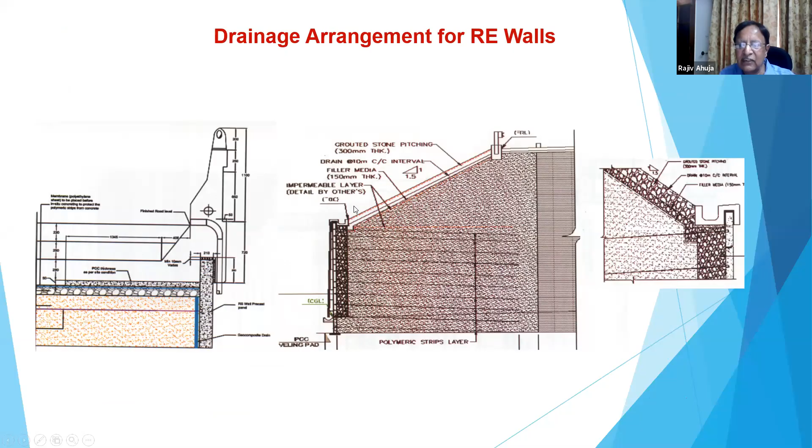In RE walls, there are certain issues concerning drainage. RE walls are sometimes very long, so we have to provide a downtake pipe at regular intervals to drain off the water. If the RE wall is provided at the edge, then a gully has to be provided so that water is collected through a chute drain and disposed of. Otherwise, it will seep through and reduce the shear strength.

So if weep holes are not done properly, or if the filter media is defective, then the weeping is too much and soil starts coming out.

Retaining walls may fail for various reasons. These are the possible reasons: saturated backfill instead of assumed dry backfill, weep holes that don't weep, design errors, calculation errors, unanticipated increased loads, mistakes in utilizing software, detailing errors, and improper reinforcement placement. These are real reasons I have myself encountered many such errors.

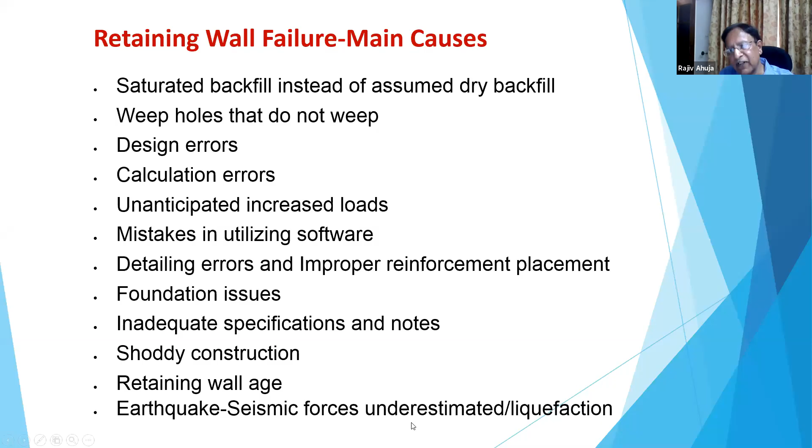Because of lack of time I will not be able to cover all of them. Then there are foundation issues, inadequate specification and notes, shoddy construction, and age of the retaining wall. If the age increases, these factors may come subsequently. And earthquake - seismic forces underestimated, or liquefaction of the backfill. So I will skip through these, as they are well known.

Now, when I say failure due to foundation issue, sometimes you have a very weak strata near the toe, and the wall may rotate, or it may happen on the heel side also if there is soft clay or very soft strata.

Then due to age, there may be deterioration of quality of material, change in earth fill property - saturated against dry earth fill - or additional hydrostatic pressure which was not anticipated, additional loads due to increased surcharge not anticipated, increase in earthquake forces, and change in drainage condition such as clogging of weep holes. So weep holes or any drainage system also require regular maintenance.

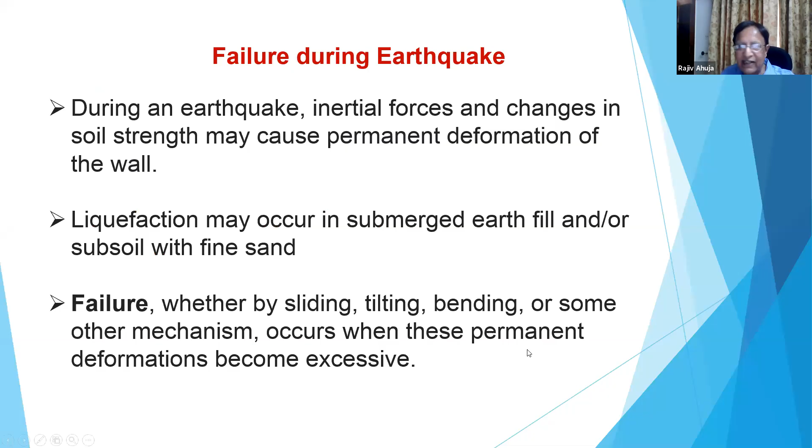Failure during earthquake happens due to large inertia forces and changes in soil strength, which may cause permanent deformation. Liquefaction may occur in submerged earth fill or even in subsoil. Failure, whether by sliding, tilting, bending, or some other mechanism, occurs when these permanent deformations become excessive.

Failure of RE walls is very common, and the reasons may be same as for conventional walls. Other reasons may include inadequate connection of geogrids with fascia panel, and tension and pull-out failure of geogrids. It is not recommended for submerged areas.

From my experience, I have noticed that certain details are simply not given by the RE wall agency, and the structural consultant also does not specify this.

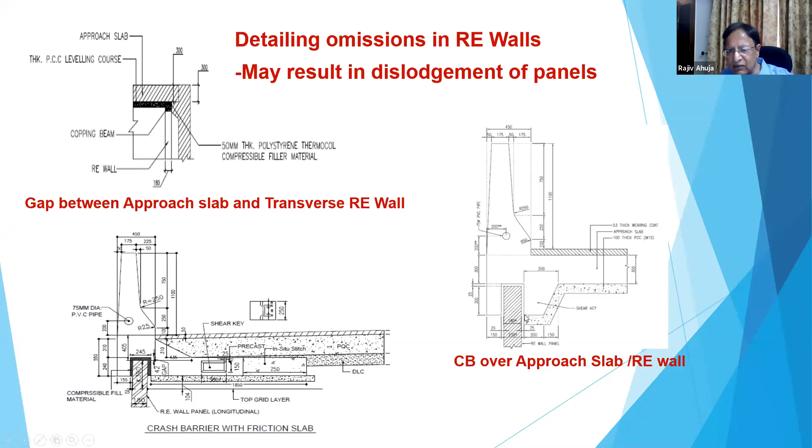Shrinkage and temperature cracks are common, particularly in long retaining walls. These happen because of restraint. If you are constructing a long retaining wall, it is not free to shrink. There is a loss of moisture, and it is held by the base slab. Since it is not free to shrink, it will develop cracks.

How to avoid these cracks? Vertical control joints and horizontal reinforcements are normally used to control cracks in walls. For this reason, codes specify a minimum horizontal reinforcement of 0.25% of concrete area in RCC walls. The spacing of control joints depends on the amount of horizontal reinforcement. Larger spacing requires heavier reinforcement.

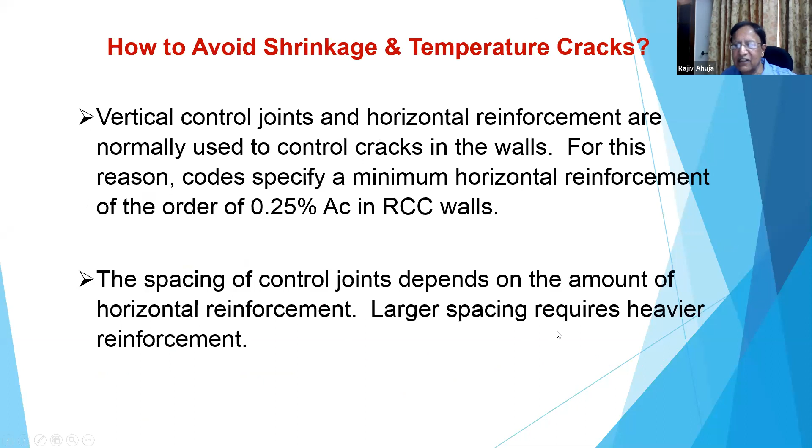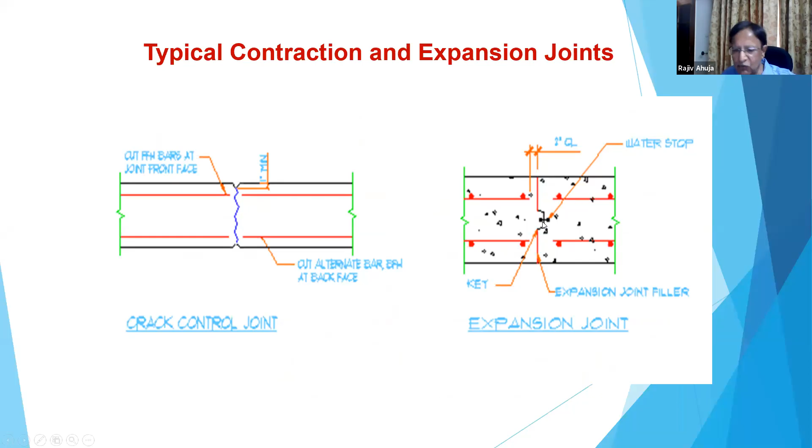Wherever you provide an expansion joint, it's better to provide a water bar, or you may provide shrinkage gaps filled with some flexible material.

That's it from my side. Thank you very much for your patience.

Thank you very much, Rajiv. Excellent presentation, excellent, very wonderful and insightful presentation, very informative. I'm amazed at the wide coverage that you have given in such a short time. Very nice. I think moderator, Dr. Anil Sheth, may now please take it forward.